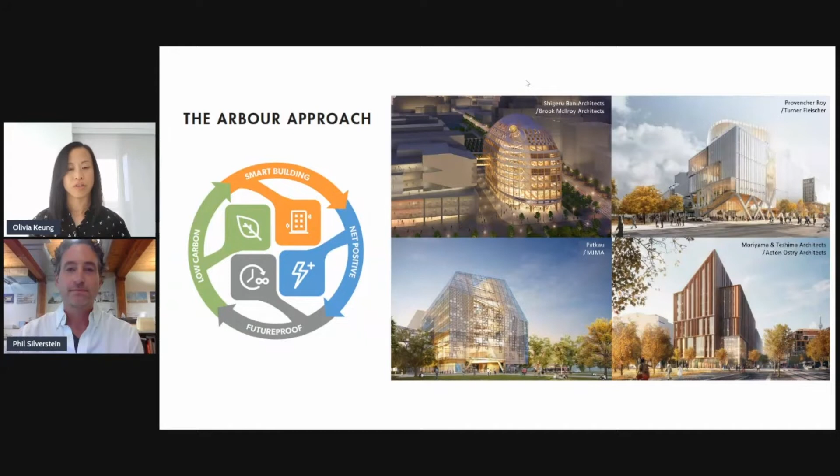We are partnered with Acton Ostry Architects from Vancouver, who bring a wealth of experience in tall mass timber buildings. Beyond mass timber, George Brown also had a very strong sustainability mandate for an operational net zero carbon building, as well as future-proofing the building in terms of resilience and looking at future climates and integrating smart technologies in order to further this target.

So the Arbour is located in downtown Toronto on George Brown College's waterfront campus.

This context is important because there's a need for this building to create strong connections to the public, and enhance and give back to the public realm right outside our doorstep.

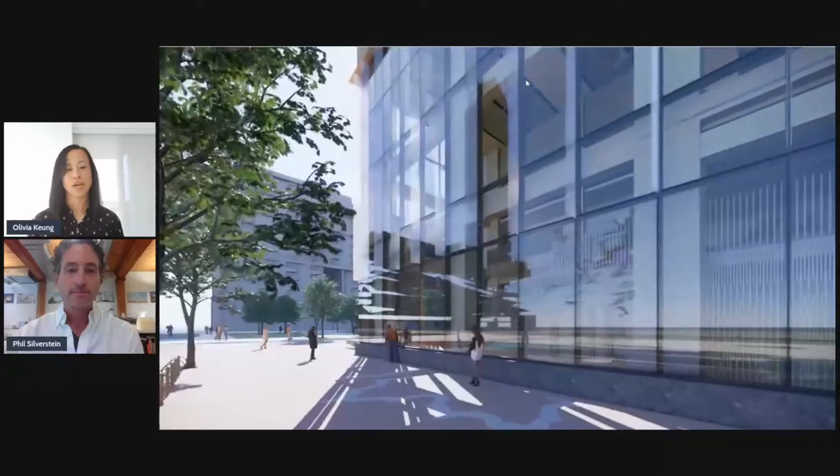The heart of this building is a series of open, collaborative student spaces that continue all the way up through 10 stories, knitting together the verticality of the building. This location also gives us a great opportunity to announce our strong sustainability mandate to the city in a very public way. So the ground floor consists of these student spaces, plus a childcare facility and a student fitness center.

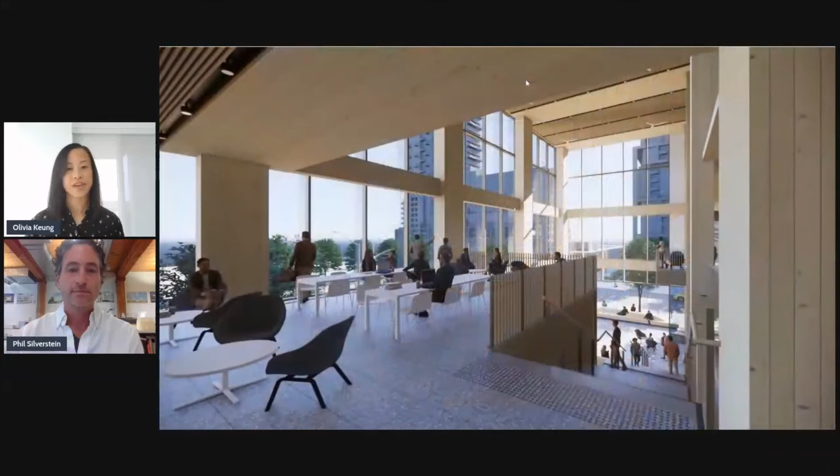When we look at the landscape of tall mass timber buildings today, there's a growing number of projects going up around the world, many residential or commercial office buildings. The Arbour is unique in that it's an institutional building, classified as an assembly building, and in this category it will be one of the tallest in the world. This typology brings its own set of challenges.

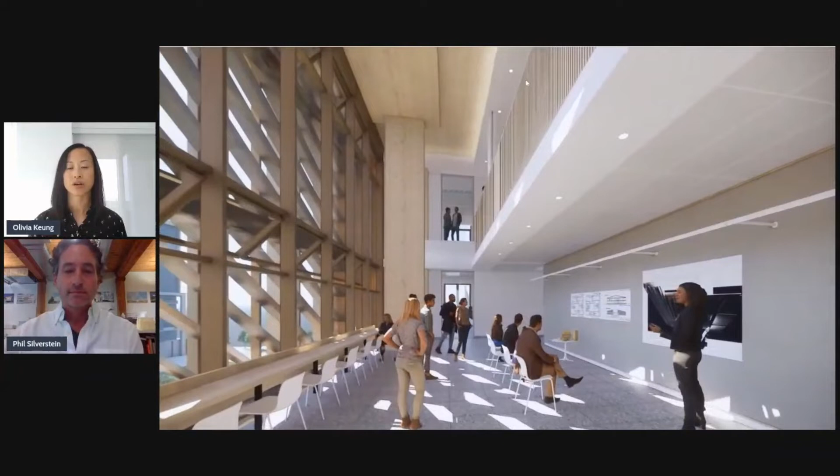One of the main challenges is the need for spaces like this with a larger span - gathering spaces, classrooms, lecture halls, and event spaces. In a tall building, we want to achieve this without resorting to the deeper beams we normally see in mass timber structures.

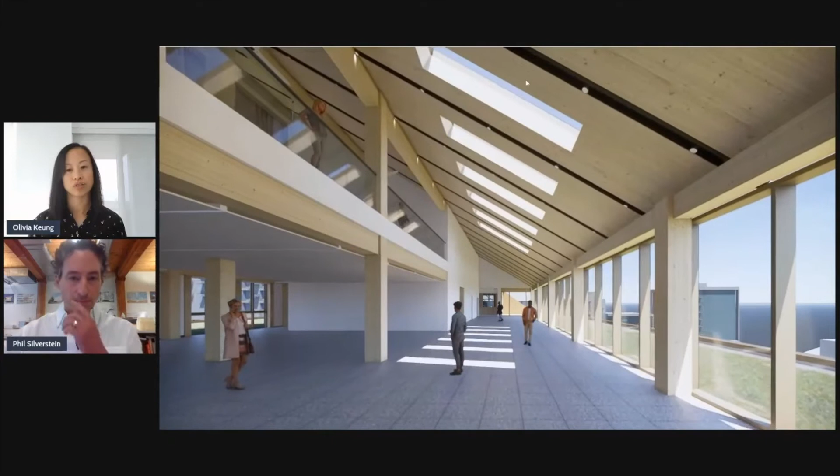So the structural solution developed for the Arbour is a beamless solution, that's also a made-in-Canada solution. It's based on a module that will enable all of the big players in Canada to replicate this structure.

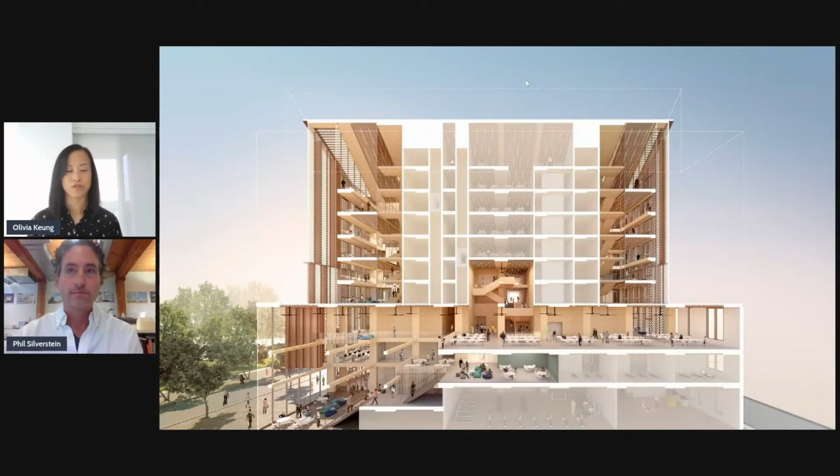This is where the inspiration for our design began - understanding that mass timber structures are very dense structures. There was a desire to carve out of this a series of open, social, collaborative spaces for intense student activity that continues throughout the building.

If you go to the next slide, this is our learning landscape that really continues the sidewalk up through the building, up to the 3rd floor. Next slide - and it continues up to an interconnected stair, and then up through the breathing rooms.

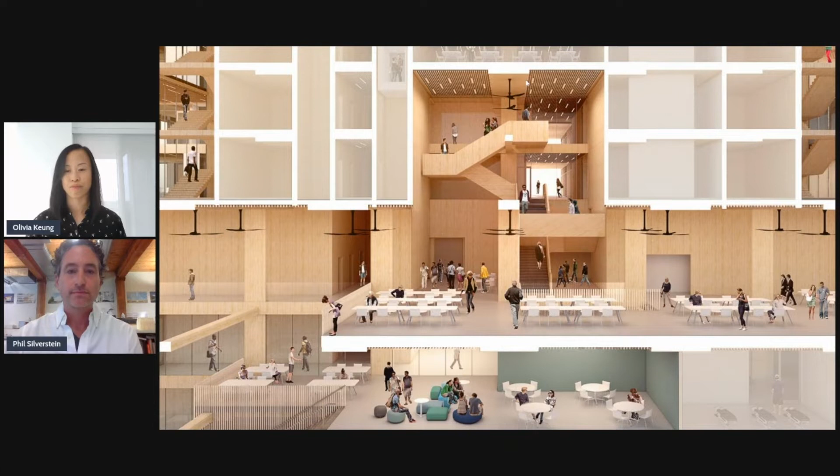The breathing rooms continue to the 9th floor of the building, and they sit against the solar chimneys, which are the vertical spaces you see right outside the breathing rooms on the east and west side of the building.

The solar chimneys are central to our sustainability strategy, but they also signify the need to consider health and student wellness. So all of these are broadcast in a very public way on the east and west sides of the building. The solar chimney is our natural ventilation strategy.

It's required to rise up almost 2 stories above the main volume of the building in order to pull air through the stack effect. The mass timber structure dictates that we want quite a simple building form. So what we're looking at is a design fully derived from the structural innovations as well as the sustainability features of the building.

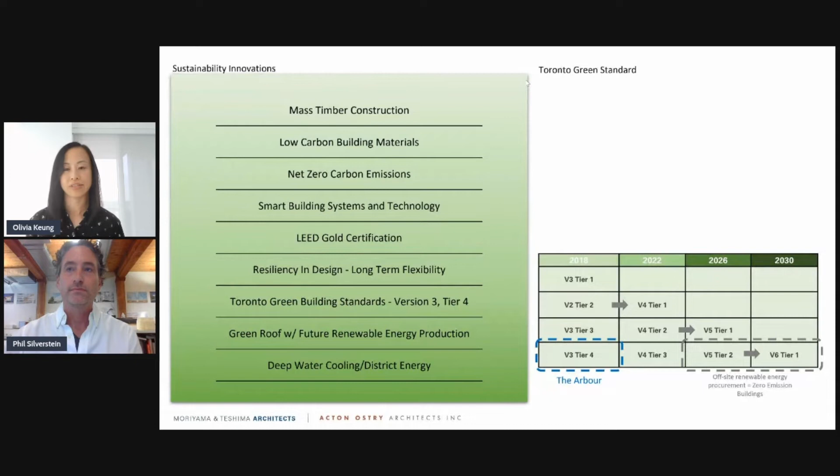This slide shows our sustainability strategy. We always look at our passive strategies first in order to drive down our total energy consumption before we start looking at our active systems.

Our passive strategies include an excellent building envelope and high performance glazing, natural ventilation, and daylight harvesting. The building will operate in passive mode for more than 35% of the year. So on a day like this during shoulder season, the HVAC systems in this building will pretty much not be on.

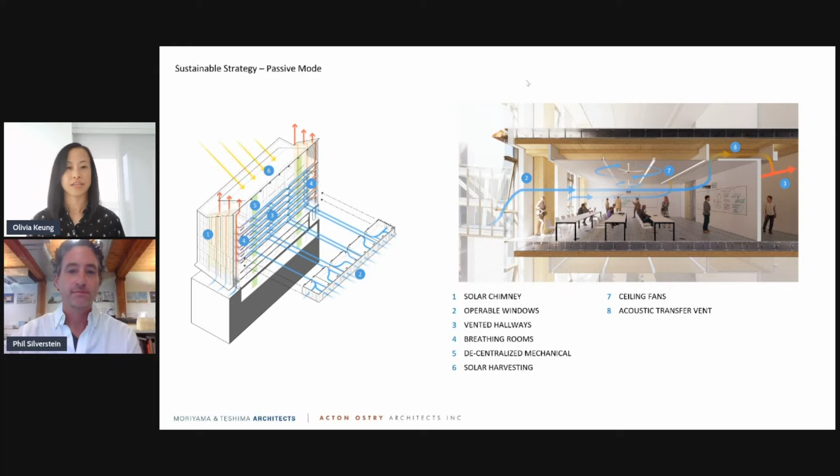So this slide shows our active system. When it gets a little bit hotter or cooler, our active systems kick on, and they are fueled by a district energy system and distributed through the building in a decentralized HVAC design. This shortens our runs and makes the system much more efficient.

You can see in the classroom section on the right side of this slide, our ventilation is being distributed through an underfloor air plenum, and heating and cooling happens through the radiant panels in the ceiling, distributed through heated or chilled water.

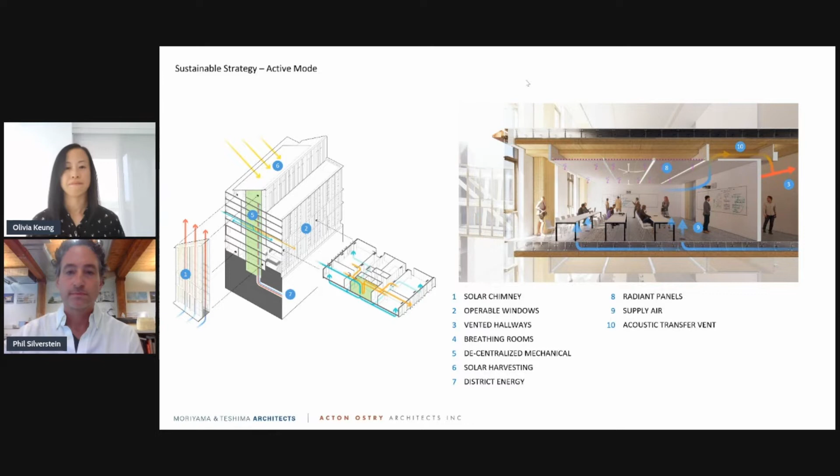So how does a building like this come together? We have two rules of thumb that I want to give you. First, sustainability needs to be a topic of conversation from day one. It's very difficult to decide later on in the process that we want to design a zero carbon building. The second is that it requires intense collaboration and coordination within the team.

So what we're looking at is an image of one of the breathing rooms, and I want to dissect what's happening in this space so that you can appreciate why this level of coordination is required. The breathing room is one of the social interaction student spaces, and there's a large amount of exposed mass timber structure in this space.

It also sits against our solar chimney, which you can see outside the curtain wall on the right side of the slide. Our operable windows are open, so we know it's operating in passive mode, and air is being drawn out through the windows and exhausted through the stack effect. The diagonal blades outside the curtain wall are sunshades, and they control the amount of daylighting and solar heat gain coming into the space.

And finally, this is also an interconnected floor space, so how fire behaves and how smoke travels has been heavily considered in this space.

Logistically, what we're looking at is an image modeled in Revit, the same Revit model we're using to produce our contract documents, rendered in Enscape. So everything we're looking at, from the guardrails to the ceiling finishes to the mechanical and electrical systems, has been modeled down to a level of detail beyond what we normally see. Mechanical and electrical systems have been modeled down to a 1-inch conduit.

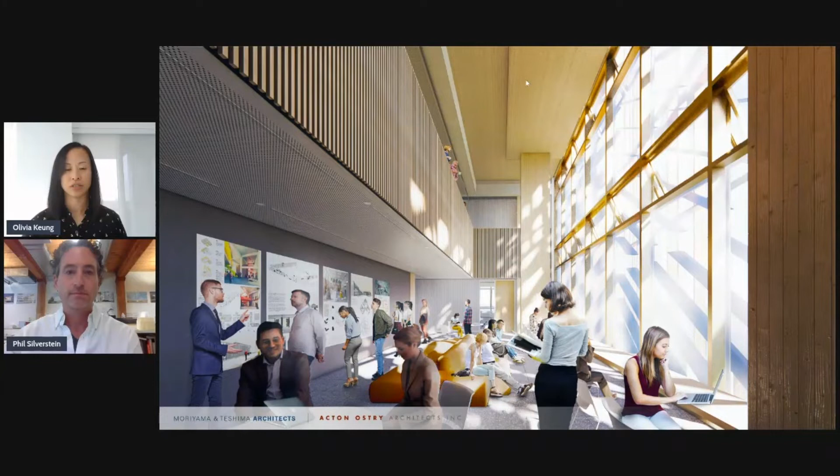So the next slide shows a series of diagrams developed for authorities at the city to understand how the solar chimney operates, and these diagrams were rendered in Enscape. You can see the passive ventilation mode on the left side, showing the operable windows in the blue arrows in an open state, pulling air out and exhausting it through the louvers at the top, and then active cooling and heating mode on the right side.

And these were important for everything at the city, from our alternative compliance application, understanding how smoke travels, even something as simple as calculating the GFA. It's not every day that the city receives a set of drawings with a solar chimney in it.

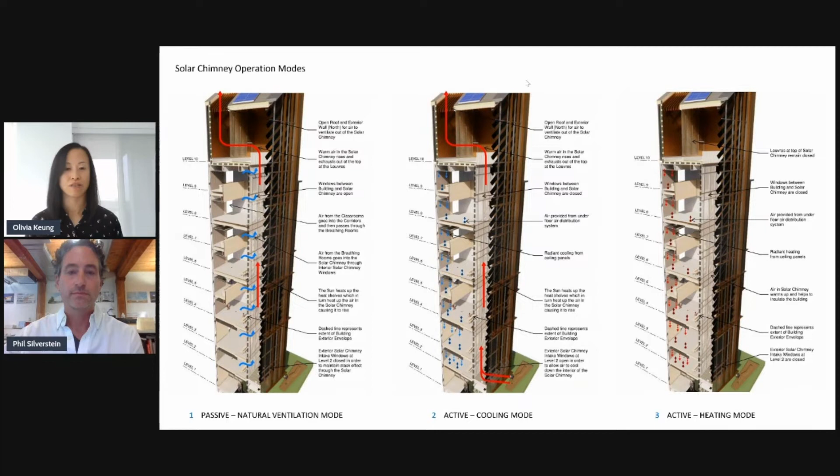Next slide. So another software we had to really push to its limits was the energy model. In a project like this, we use the energy model more as an iterative design tool in a very active way, and the design of the building envelope is a good place for you to understand the level of coordination required.

So our building envelope is doing a number of things for us. It's controlling heat loss, and in this design we're targeting an effective R value of R35. It's also controlling the natural ventilation.

Next slide. All of these factors also need to be weighed against the design of our prefabrication system. Prefabricated envelope is something we often see in mass timber buildings because of the need to enclose the structure and protect it from moisture as quickly as possible.

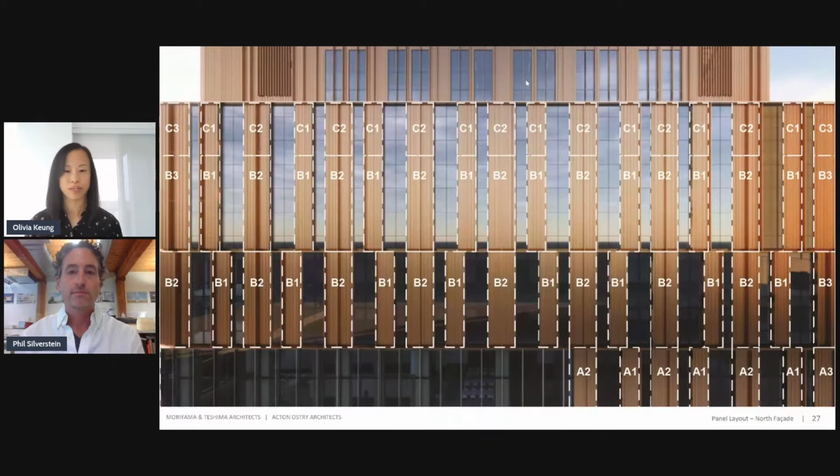Next slide. So our goal is really to regularize the facade as much as possible and minimize our panel joints, because this is the weak point in terms of thermal heat loss.

Next slide. And then finally, our envelope is also regulating daylighting. So in building science, we often learn as a rule of thumb that we want to reduce the window to wall ratio as much as possible.

It was a bit counterintuitive learning that in a high performing building like this, we've reduced the heating load so significantly that other loads start coming into play. At a certain point, increasing our window-to-wall ratio to gain more daylighting gave us more meaningful energy savings. The other reason is that when we talk about sustainability, we also want to think about human experience, health and well-being. We've created a space that's healthier for student learning, and we know daylighting is critical for student productivity and well-being.

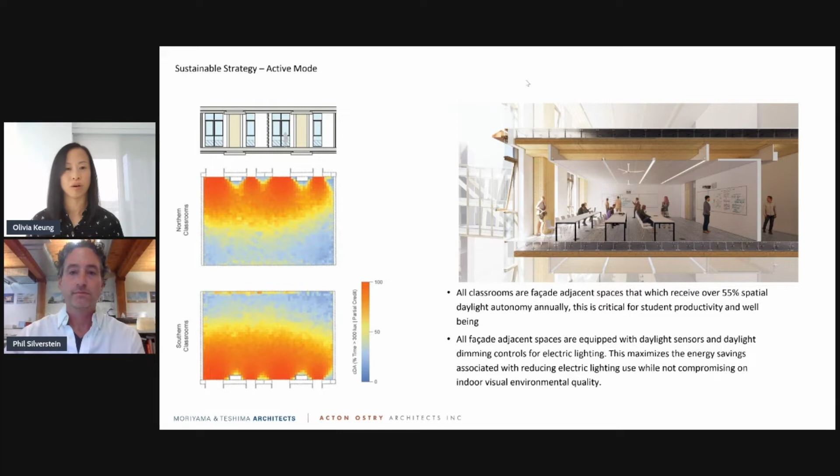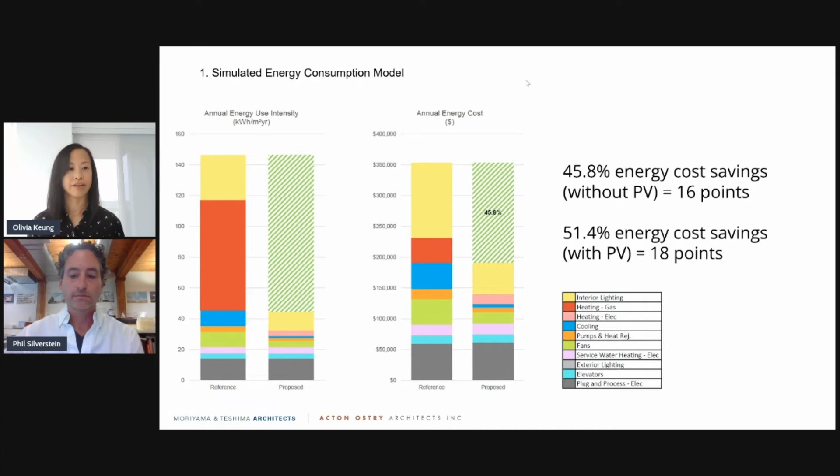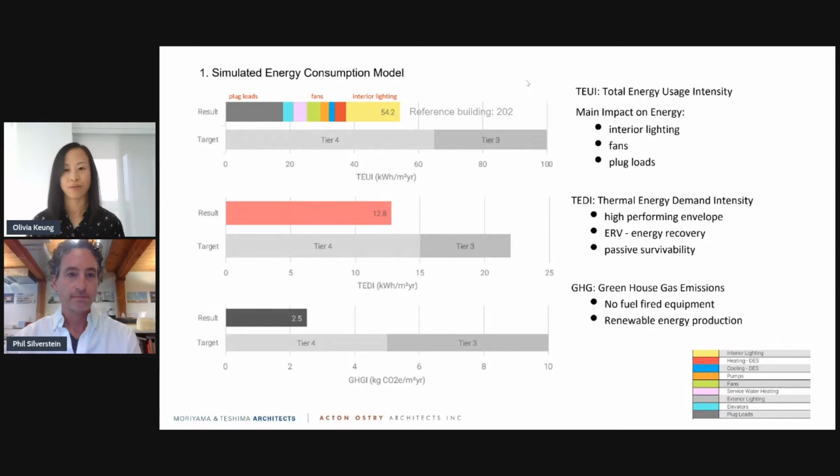All of this is even more amazing because the Arbour is located on a tight urban site. In the landscape of zero carbon buildings, we've only begun looking at this typology, but we know that the majority of the world today lives in urbanized environments. So if we're going to really make a dent in our fight against climate change, this typology is really critical for us to get a better understanding of.

Now I'm going to pass it to Phil to speak to the other side of the carbon equation, which is materials and structural innovation.

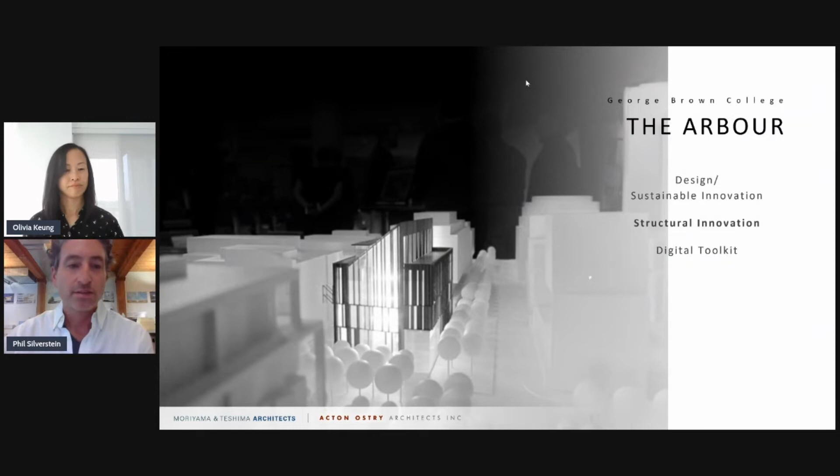Thank you so much, Olivia. There's so much that we're proud of in terms of sustainability and innovation. Even the prefab facade alone is something new to North America, definitely new to us. But one aspect I'm going to touch on is the mass timber and the structural innovation.

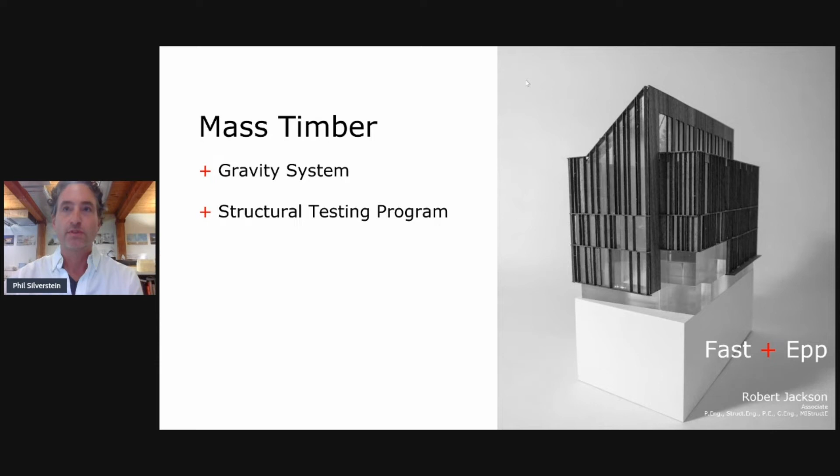First, I'll describe the gravity system and the main structural system of the building, and then get into the structural testing program we used to validate the main flat slab system.

This is an image provided by our structural engineers, Fast + Epp, and it's a really simple system, a bit of a hybrid. We have concrete caissons that go down to bedrock, concrete foundation walls, ground floor slab and feature stair. Then rising up from there is a steel lateral core, post and beam and diagonal bracing, and then a fully mass timber system right up to the roof panels.

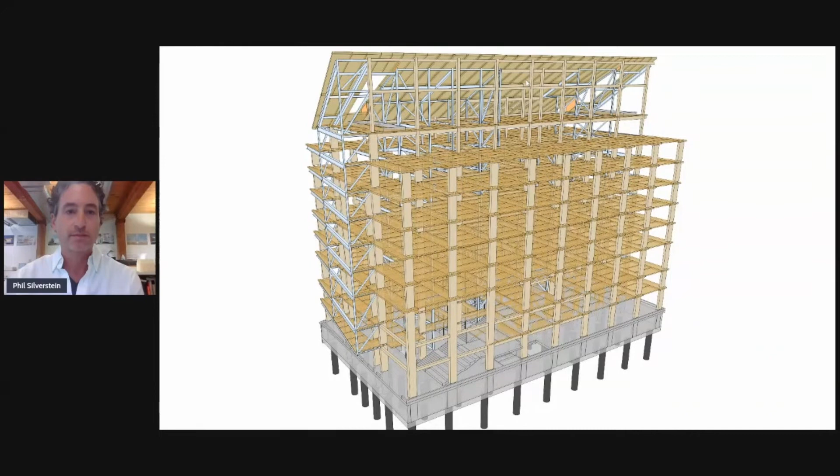During the competition, one of the things we faced was trying to develop a system that could be used across the board by all building typologies — assembly, residential, commercial, what have you. We were really looking at a flat slab system that didn't have deep beams like you see in this image, because we didn't want to sacrifice ceiling height.

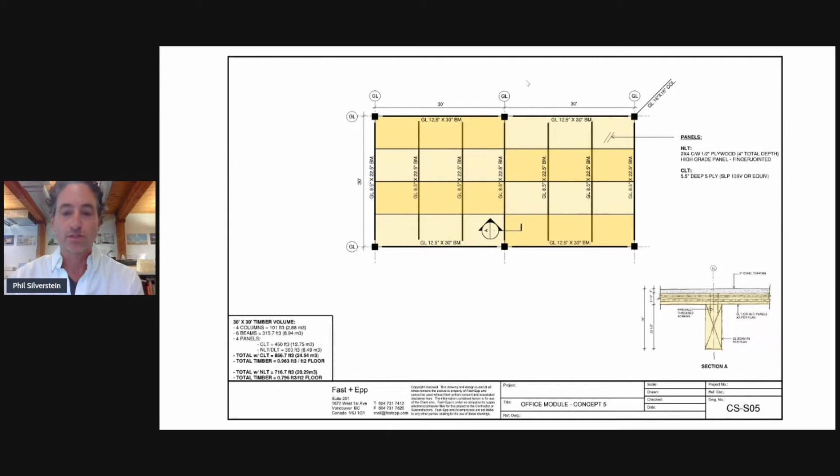We did want to span 30 feet, or 9 meters, and there are many ways to do that. What you're looking at here is an image supplied by Fast + Epp, our structural engineers, and this is the most economical way to span 30 feet. However, that is not the solution we were looking for at the Arbour. What we ended up developing is an unbelievably brilliant system, in conjunction with ourselves, Acton Ostry, and Fast + Epp.

We've developed a system that's diagrammatically shown here, starting with the columns. The columns are 430 millimeters by almost 1,200 millimeters, so they kind of act like walls — and for that reason we've called them 'wallumns'. It's not the greatest name, but we're kind of stuck with it. Spanning between the wallumns are these long, beyond 9 meter, slab bands.

These are composite panels — a 7-ply CLT system with a composite concrete, 150 millimeter thick topping. In between that, we have these infill panels, which are also 7-ply. You can see in the middle of this image here there's a red section.

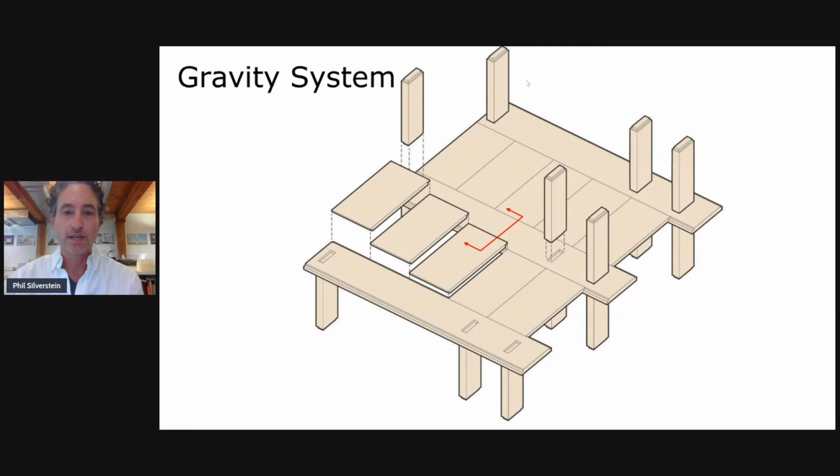I'm just going to highlight that red section there. You can see how unbelievably thin this system is. This is beyond a 9-meter span, and you can see that the extension below the main infill panel is only 150 millimeters, or 6 inches, below the main span.

Here I've highlighted the exact component I'm talking about, these long slab bands. When we get to a column connection, there's just 2 cores through the slab band, which allows us to connect from column to column. Then we infill with concrete around the steel post for fire rating.

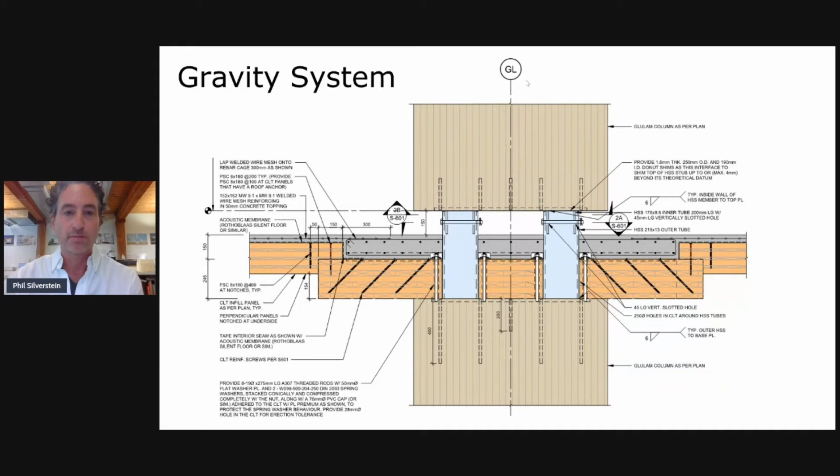So I'll just walk you through the simple floor plate. Like we mentioned, it's a 9.2 meter span, 9.2 by 7.2. That allows us to have this huge, wide, column-free space that lets us program this any way we wish, from large classrooms to small classrooms or offices. It also future-proofs it for any kind of future tenant that could move in.

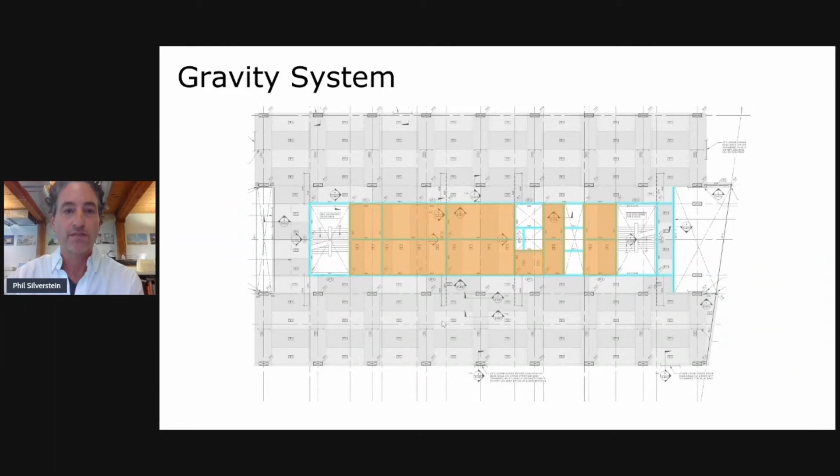So the north side and the south side of the building are a 9.2 meter clear span space. We start by going up three levels at a time with a steel post and beam and diagonal braced lateral core, then infill that core with 7-ply CLT slabs.

The glulams then go in at a regular grid, and around the perimeter we have tie-back panels, followed by these 9-meter slab bands. We also call these slab bands, the other term I may be using is TCC, which is timber concrete composite panel.

These panels take about 2 days to install per floor, and then another 2 days to install the infill panels. Once these are installed, we follow up with an acoustic mat and a 50 millimeter acoustic topping.

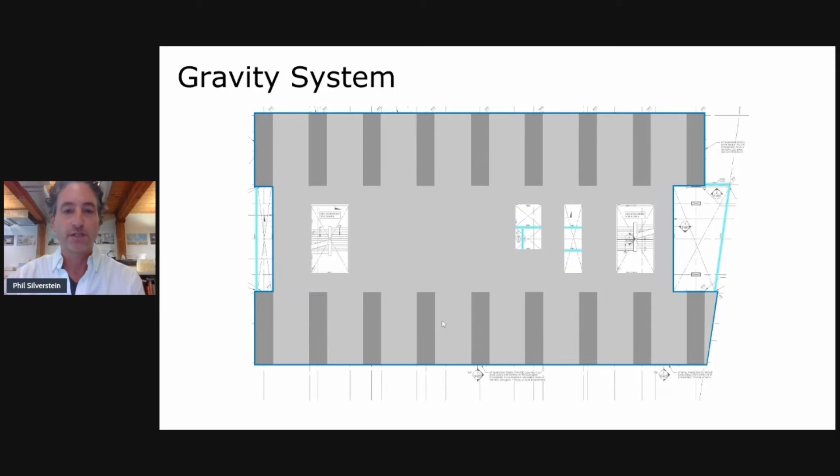So the innovative part of this system is that slab band I described before. The project received funding from Natural Resources Canada, and we developed a comprehensive test program designed to investigate the parameters for different types of composite connectors and the CLT reinforcing. We wanted to determine which system is the simplest to install, which has the lowest cost, and the most efficient TCC system.

The goals of the testing program were to determine the out-of-plane shear capacity between the wood and the concrete, the properties of various shear connectors, and the ultimate capacity of the slab bands, or TCC panels.

To achieve these goals, we actually conducted 60 tests. These are all made public, and the results of the tests verify what we actually implemented into the design.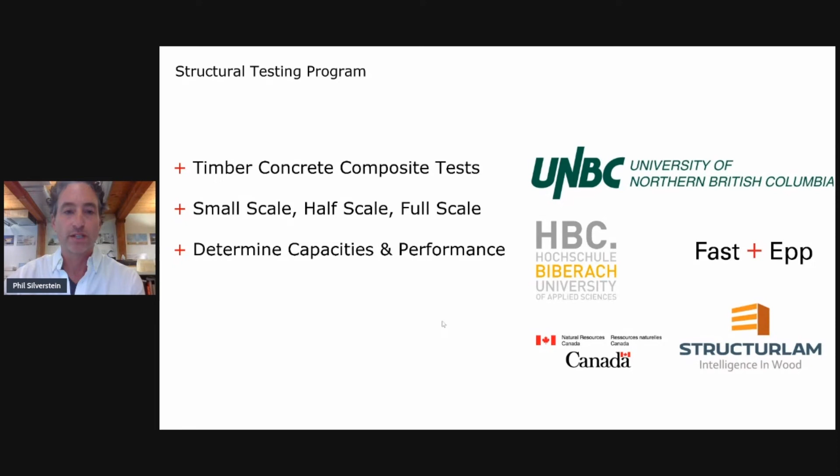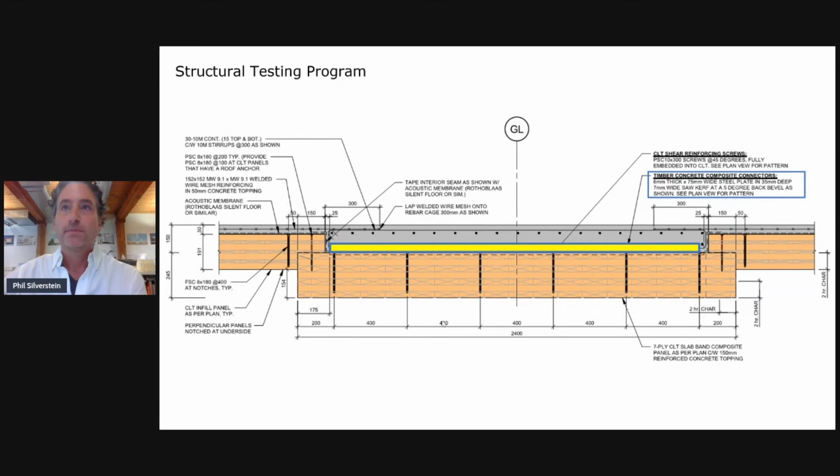Prior to testing, the industry didn't have enough specific information available as to how the various composite connectors would behave in a CLT panel and how the varied embedments would work. So we looked at 3 different types of connectors.

The top here shows the 45-degree angled screw connectors. The middle image shows steel plates, and the bottom one is a proprietary system, an HBV plate.

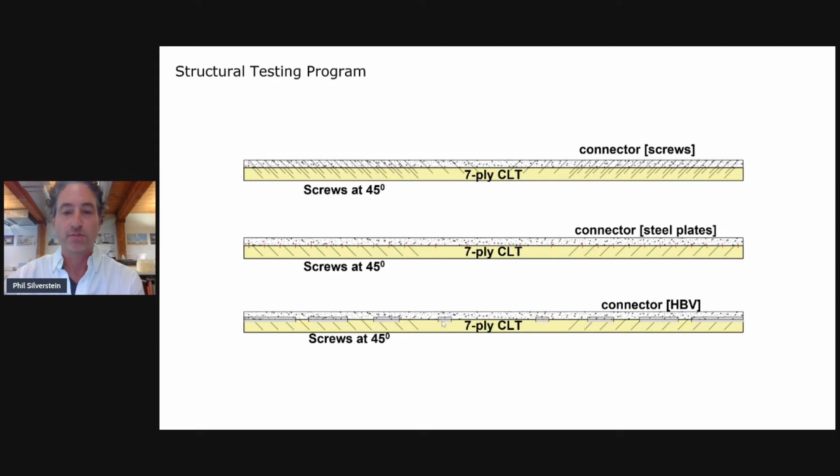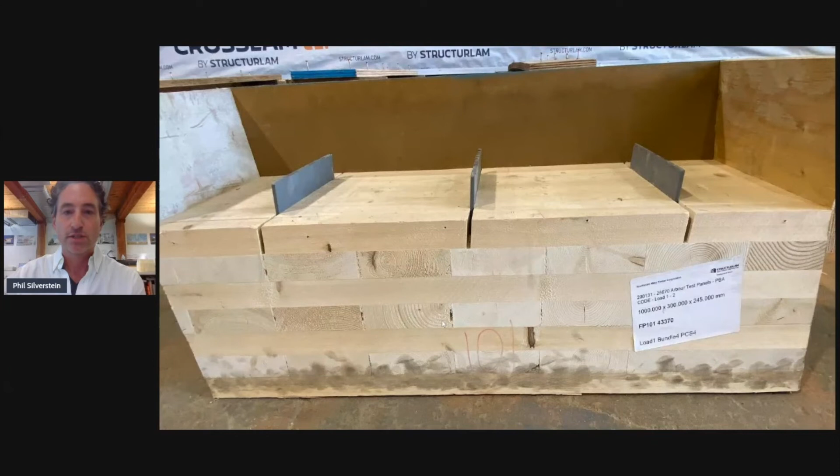Here's an image from where the testing was done, at the University of Northern British Columbia, and this shows the angled screw composite connectors. This image shows the steel plates and the trestle-grid-like HBV plate.

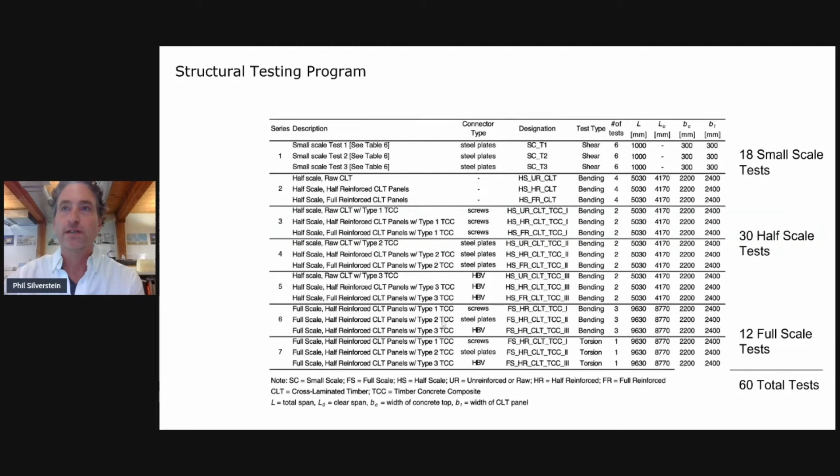We tested the unreinforced, half-reinforced, and fully reinforced panels. There were also 12 full-scale tests to test the 3 different types of TCC connectors described in the previous slides.

This is a drawing showing the three different types of samples created for the large scale tests. At the top we have the screw connectors, the steel plate connectors in the middle, and the HBV connectors.

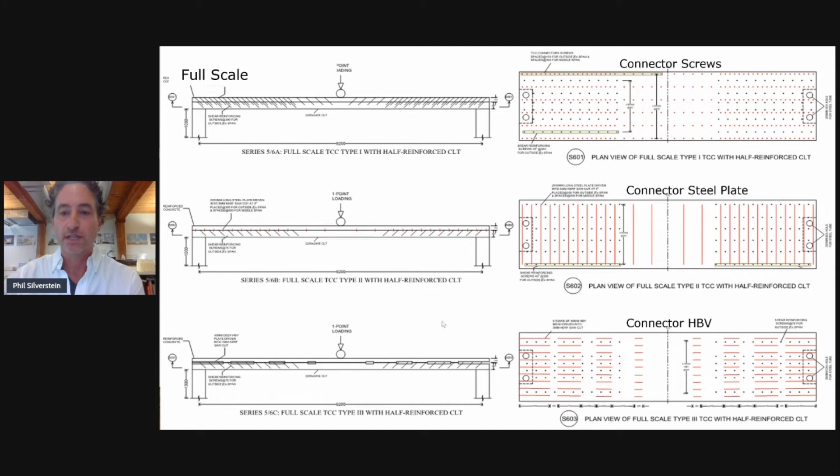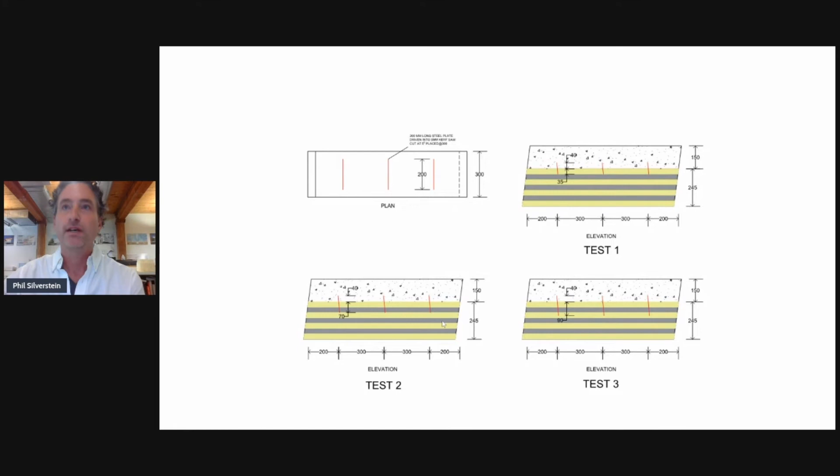The steel plate embedment was tested at three different depths: 35 millimeters, 70, and 90. This image shows the large scale sample that was tested, showing the screw connectors and the reinforcing of the concrete.

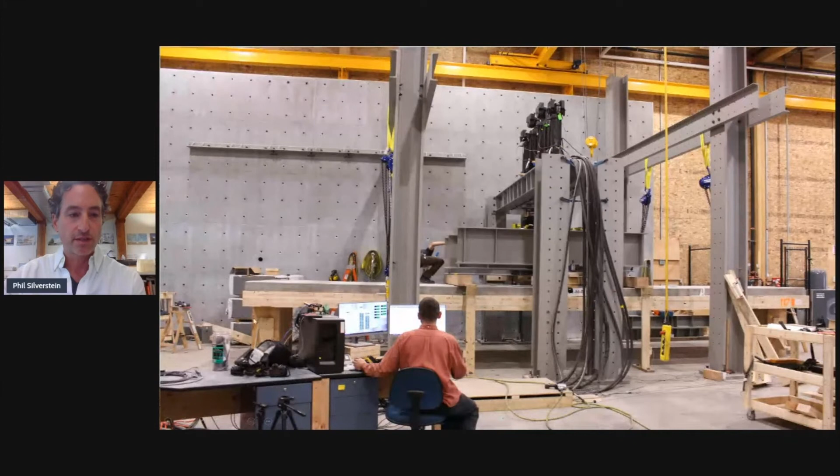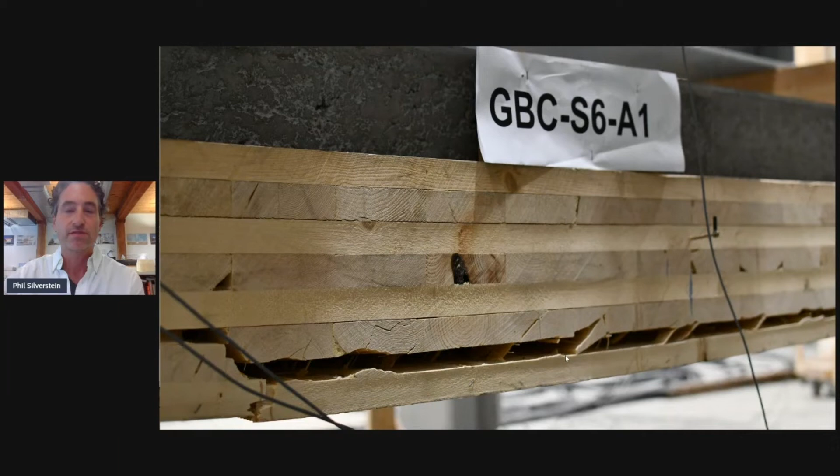So the conclusions of the test were that the small scale tests validated our initial assumptions that 35 millimeters embedment was sufficient for the TCC slab bands, and that screw reinforcing greatly increased the shear capacity of the panels. The addition of the 150 millimeter topping compositely connected to the CLT panel significantly improved the out-of-plane shear capacity by over 167% when compared to a raw CLT panel.

Lastly, the slab band with steel kerf plates exhibited the highest capacity and stiffness, and they were priced by multiple suppliers to be the most economical option. So the results and findings proved that the steel kerf plate had the highest capacity, the best stiffness, and was the most cost effective. That's exactly what we incorporated into our design.

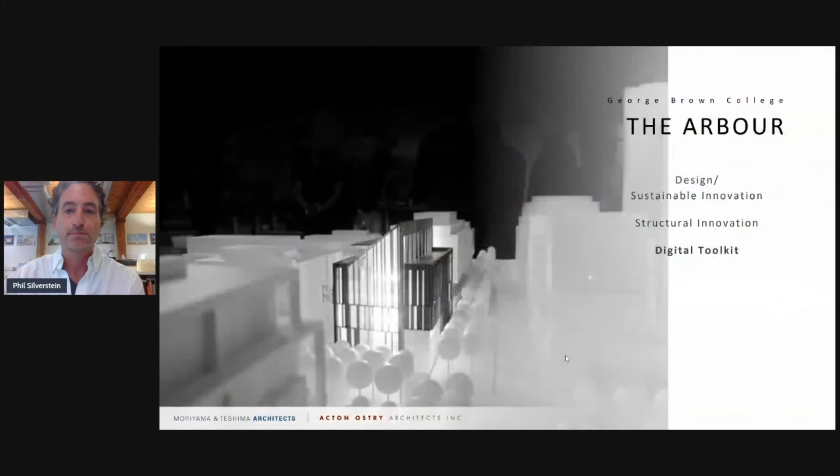So those tests are made available. It's now a system that, now that it's gone through the natural resources testing, is validated and can be used on any project worldwide.

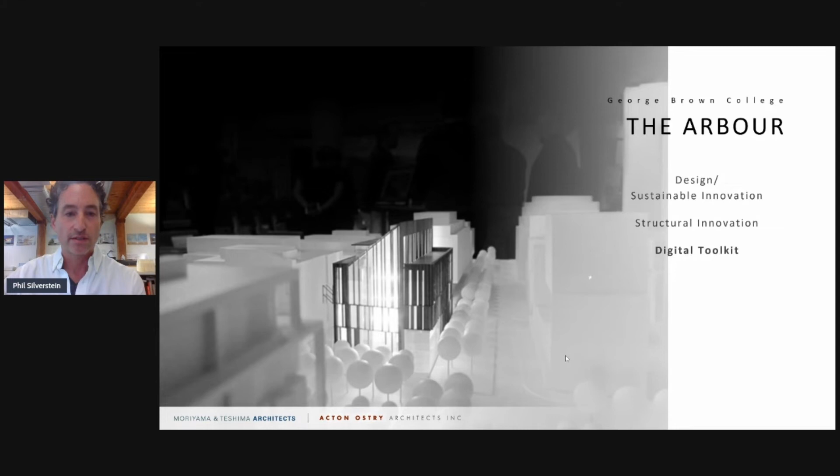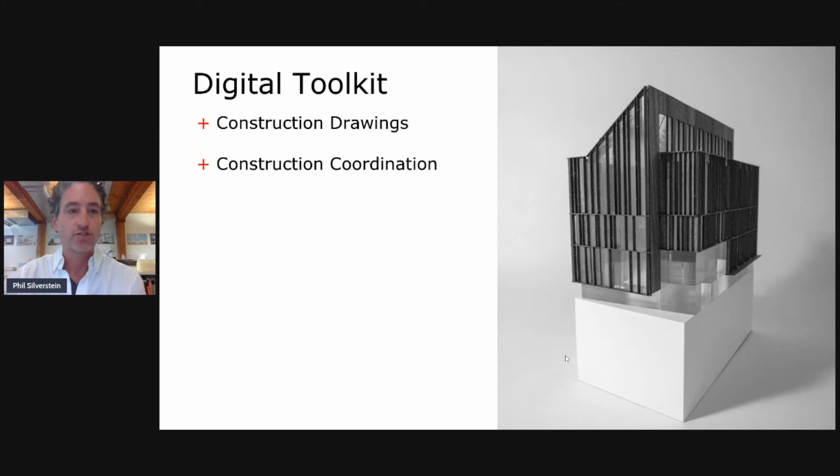So with all the structural and sustainable innovation this project went through, it took quite an extensive digital toolkit. A lot of these tools were new to us, some we'd been using for a long time, but we've re-envisioned how we use these tools in our office and how we work with consultant teams spread from coast to coast throughout Canada and the US. I'll break this down by talking about the construction drawings and then the tools we use during construction coordination.

At the beginning of the project, when we're in competition mode, we relied heavily on SketchUp. All of our modeling was done in SketchUp, and renders were sent out to Doug and Wolf for rendering. But we quickly migrated into the Revit world because, like Olivia said, we had such a high level of coordination that needed to be done.

And actually, like Patrick said when he gave his presentation from Element 5, the level of coordination has to be done very early on in a project because this timber is being cut and cored, and penetrations are made in the factory. It's not being done on site. In fact, we don't want to make any cuts or core anything on site if it can be avoided.

We started using Enscape as a 3D visualization tool, primarily for in-house understanding of the spaces, but also for client review. Our structural engineers use a program called Modelo for their 3D visualization of the timber structure. We did use AutoCAD, not as extensively as in the past, but it was done for some offhand studies.

But the one tool that was really transformative for our office was Autodesk BIM 360 document management. We had consultants from Vancouver, Ottawa, Toronto, spread out all over the country, and New York. We all needed to be connected in the cloud, so our model is hosted in the cloud and everyone connected, which allowed us to do drawing reviews in the cloud and allowed for file storage. We use BIM 360 Insight for drawing tracking and issuances.

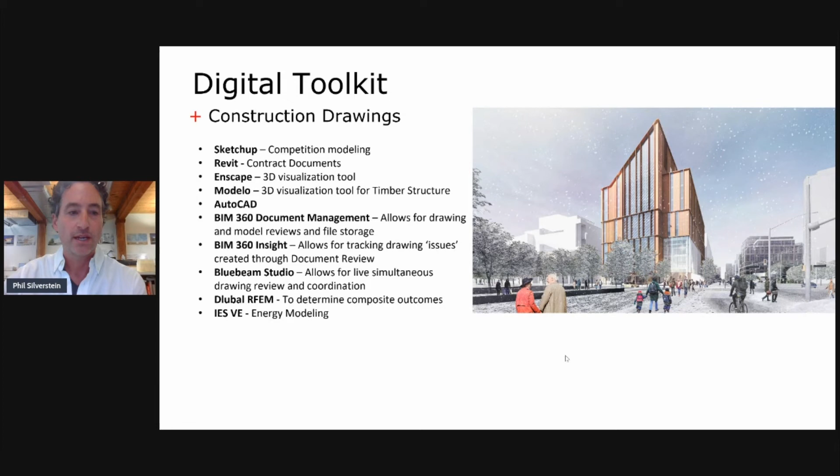We also started utilizing Bluebeam Studio far more extensively. We would load the current drawing set and create a Bluebeam Studio session that allowed live simultaneous drawing review and coordination. Our structural engineers use Dlubal RFEM to determine the composite outcomes through the timber testing program, and IES-VE was used for energy modeling.

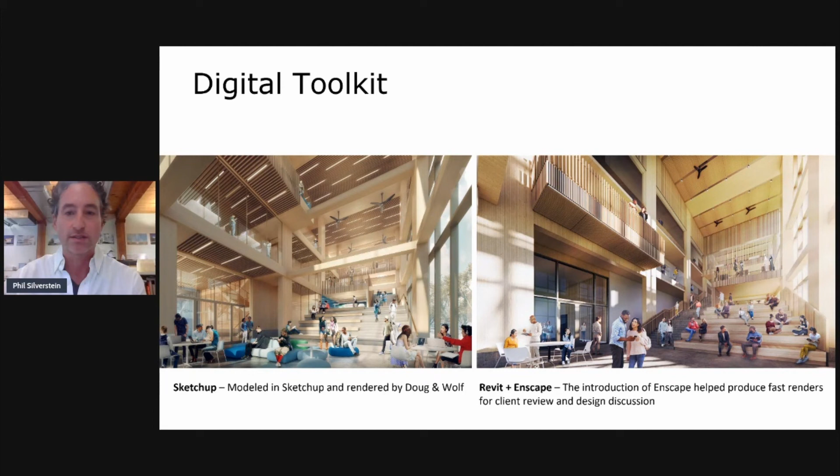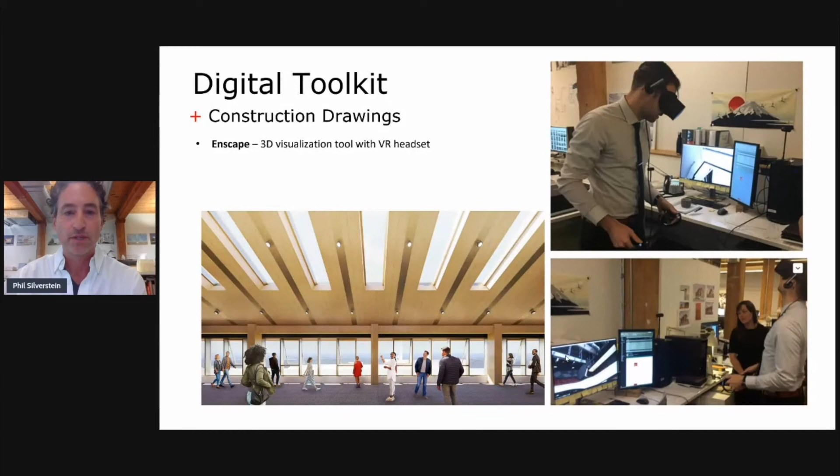We were able to play around with the proportion and scale of the skylights, the number of skylights, and how the sun affects the building, how daylight comes in at different times of day, season to season. For really the first time ever, when you're immersed in that space, you can realize things you normally wouldn't understand until the project's built. But here we are during design, fully understanding the impact of nature on the building.

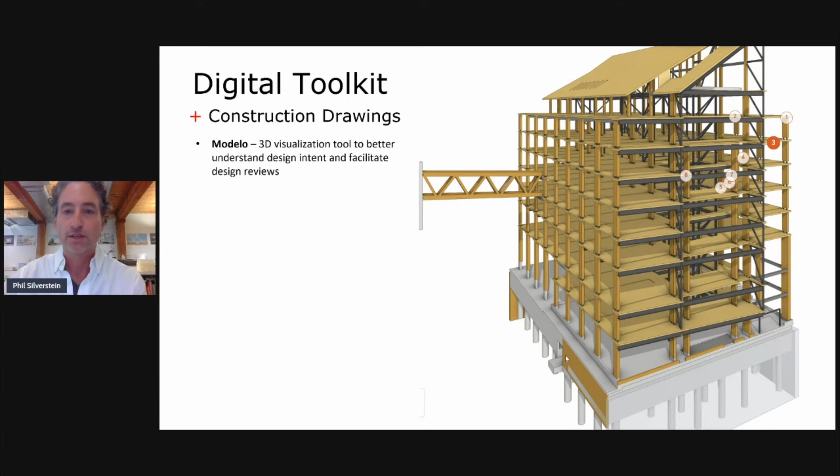Our structural engineers had a similar experience with Modelo. They used this program for 3D visualization. Another shout out to our structural engineers, Fast + Epp. They brought a lot of software to us to better understand the system. There's so much intricacy with this hybrid system. You can see the steel here is quite significant in the solar chimneys, and a 3D visualization tool like this helps us all understand what we're looking at.

So during construction, a lot of the same tools were being used. Revit clearly we're using for change management, and we continue to use Enscape as a 3D visualization tool.

Olivia mentioned that we created those sections of the solar chimneys to help the authorities understand exactly how smoke travels through the system during active and passive mode. But we really rely on Revit heavily for the coordination of elements like mechanical and electrical systems and the penetrations that are required. The constructors on the project are PCL, the Toronto office of PCL.

PCL are using the BIM 360 document management for package staging. So when we issue a change, that isn't contractually realized yet until a change order is issued. The full drawings that get issued with a change get loaded into the package staging platform in BIM 360. And then when a change order is issued, it moves up the ladder into the current set.

PCL is using BIM 360 Glue, and they use this to combine all the trade drawings. Nordic Structures is supplying the timber, Walter Steel for the steel, and then mechanical, electrical, everything is brought into BIM 360 Glue, and then migrated into Navisworks, where we conduct our clash detection.

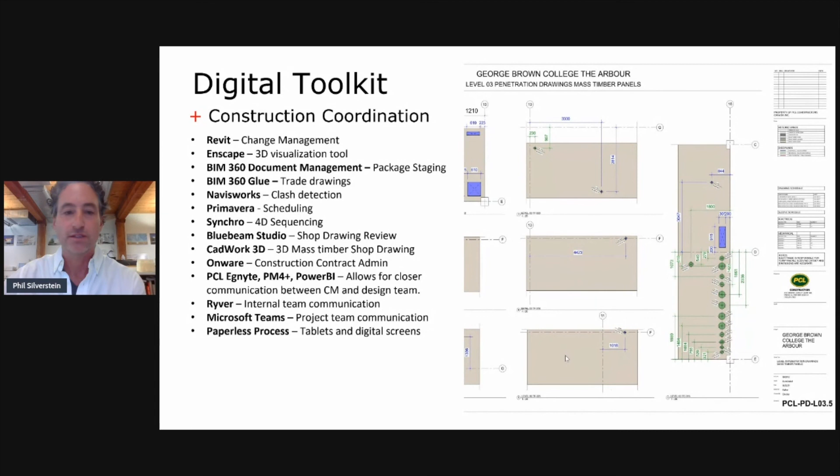This is a screenshot that I captured from a review last week. This is from CadWork 3D. I got permission from Nordic, the mass timber suppliers and installers, to use this. This is our shop drawing. Once a week we group up and fly around through this 3D shop drawing model. We also have a backup 2D print, so that anything from the 3D review can be translated into the 2D set and returned back to PCL.

Just last week, there was one area where a corner had two angles that weren't quite meeting at the same plane, and it would be impossible to understand that in 2D mode. Being able to open up CadWork and view it in 3D allowed us to see something we normally would never have known until it was actually constructed.

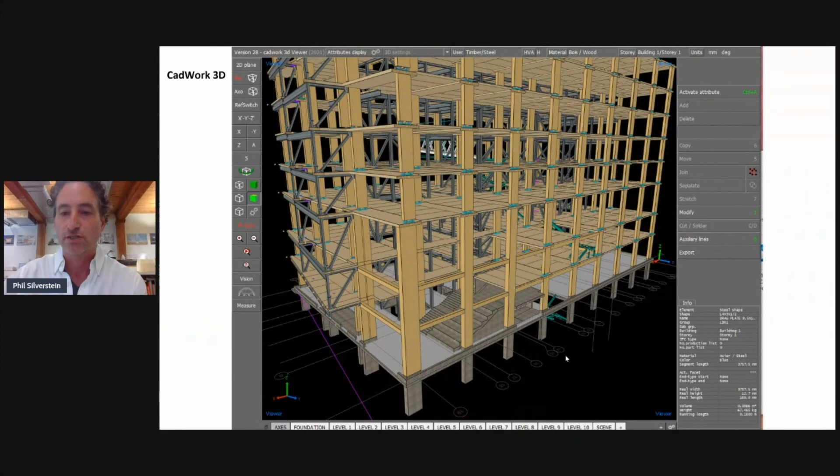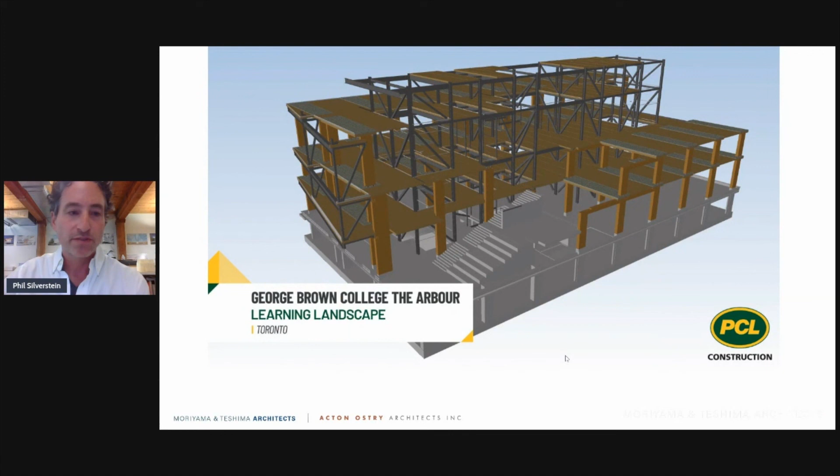So last, I'm going to play a video for you. This is Synchro, what happens when you take Primavera scheduling software and combine it with Revit. It's not the most exciting - if this was on TikTok it may only get 3 likes, but for me this is fascinating. For the first time ever, I can understand exactly what's happening on site in a visualization format that even the owner can see and understand.

This is the learning landscape and the timber being installed around it. You can see the large 3-story column with tiebacks - those will stay in place until it's adequately secured with enough bracing and tie-in beams. You can see the slab bands have the concrete topping installed; they come installed with topping. Once the columns are capped, we can remove the tiebacks.

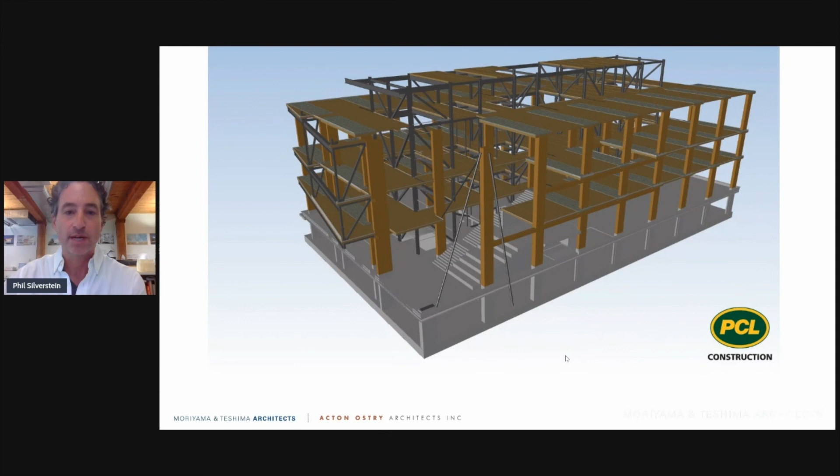The column on the far left about to be installed is the largest column on the project - a 630 millimeter by 1720 millimeter, that's a 2 foot by 5.5 foot mega column. This whole process you're looking at here is about a 2-week process, start to finish, including the concrete topping.

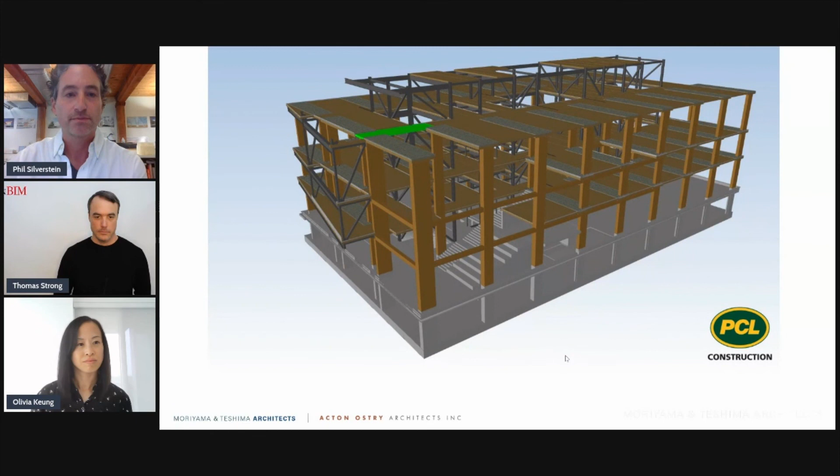I absolutely love the 4D animation there from PCL. I think if it was on TikTok, I would like it, but I'm not on TikTok. But yeah, so many amazing innovations that your team developed for this project. I love that all that information is available for other architects around the world to learn from, and I'm super proud of this work being accomplished in Toronto, Canada. Congratulations on an amazing project. I think that hybrid beam system is super innovative - it's going to enable mass timber to be used on these commercial real estate institutional projects. Amazing work, congratulations on that.

Just a high level question before we have to jump - this was a competition project, so your team put together a competition. Was the use of mass timber driven by the client, or was that an initiative you guys developed to meet the requirements of the project?

It was client driven. All of the competition teams you saw were developing different mass timber structures.

And the other innovations related to sustainability - I don't know if this is a passive house project or LEED - but obviously this solar chimney is super innovative. Were all these things developed by your firm, or were these requirements that the owner demanded be incorporated, like meeting certain sustainability targets?

I think meeting Tier 4 of the Toronto Green Standards was decided on from the very beginning, and the full team - our design team as well as the client team - worked together to develop a project charter, deciding what we wanted to target early on and making sure we stuck to that throughout the project.